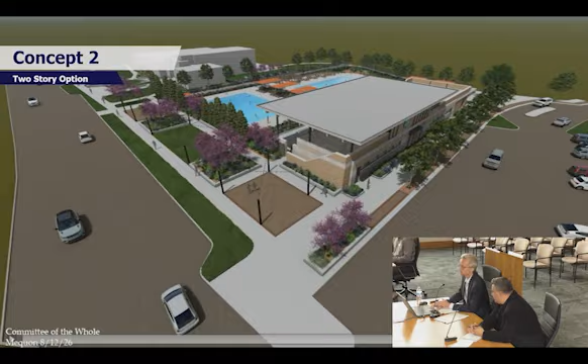Thank you so much. I'm trying to find our presentation, if you give me one second. What am I missing here? They're not seeing the same one. I apologize, I thought we had this. I apologize, Will. Maybe a little assistance here. I can't seem to get the presentation up. Pat, you got it? All right, I'm just trying to pull it up. Yeah, it's not reflecting on there. Make sure we have the right one up. That should be right. Okay, I want to start it from the beginning. That's awesome.

Because we're building a future for the community. What's page one? Page one is this one right here. It's not board—is it going through the wrong one? I wonder what slideshow this is. It's not syncing the two. I don't see what's being presented. Yeah, that's interesting.

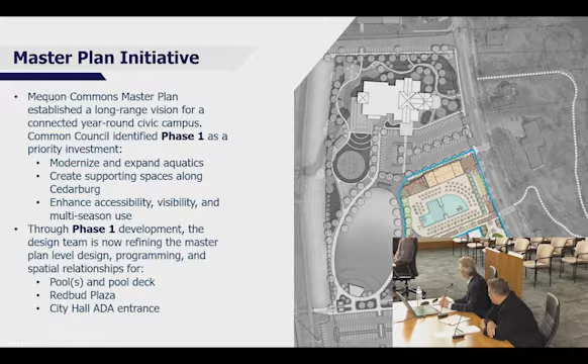Good to see you guys. Just a reminder, I'm not going to spend a ton of time on this because we went through it before and we were here in April under a tornado warning, if you recall. We've had some of that weather recently.

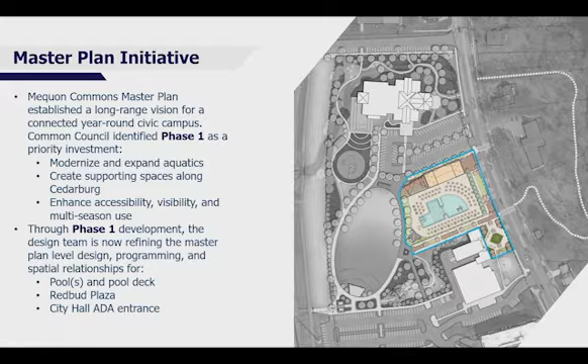But as a reminder of where we were and where we ended up, and where we're starting from in this process: the master plan identified a vision for the entire campus and engaging the rest of the community in a public space. Part of that phase one was focused around modernizing and expanding aquatics, creating supporting spaces along Cedarburg. You do a lot of public events to invite people out, inviting people from Cedarburg into the campus and how the interface works there, enhancing accessibility, visibility, and multi-season use. You challenged us to think about ways we could bring people into campus and use the space in different ways. This initiative is the first phase in increasing that activity and visibility.

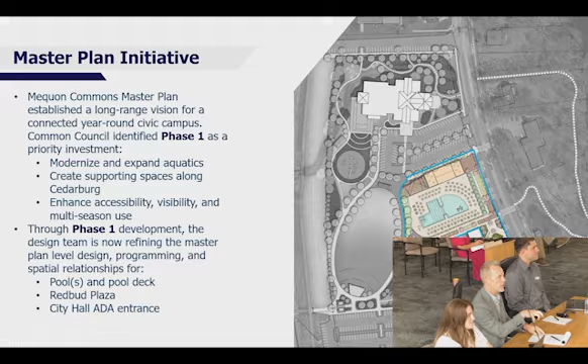Through this development, we're now refining that master plan, moving beyond the high-level master plan into something more detailed, thinking about the programming and spatial relationships that go into building a new pool and aquatic facility, the deck, and all the things that go with it, including the building itself that services that pool. Then thinking about the Redbud Plaza piece, how we're getting people into the site, and also the City Hall ADA entrance and how that might work.

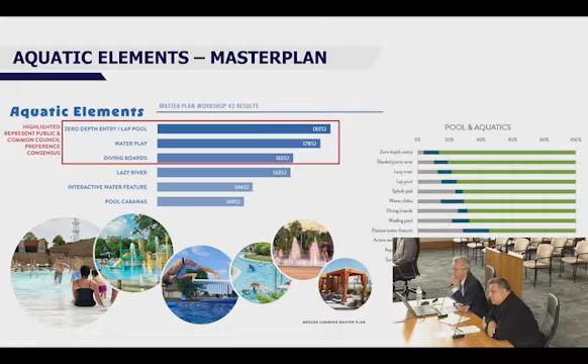As part of that master plan, there was data collected which impacted this portion of phase one, and we wanted to highlight those for the team. This is a snippet from the master plan in which the community, along with some preferences from council, emphasized using a zero depth entry pool, a lap pool, water play features within phase one of the aquatics component, and some diving boards. We wanted to use that as a reference from the master plan, which we embraced as part of our design as we proceed to move forward.

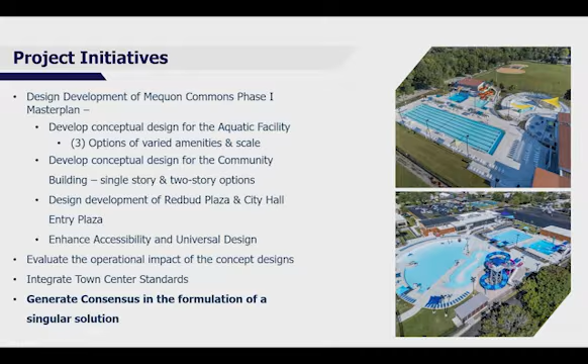Before I start showing some of our design criteria, I want to talk a little bit about the format for this evening. There's a lot of content that we're going to share, a lot of which was shared with you previously to our meeting. What I'd like to do is separate the presentation out so we can break the entire presentation into smaller pieces. So we're going to start with the aquatics component in its entirety.

We're going to show you concepts, costs related to those concepts, and operational and revenue generations with regards to those. Then we'll stop the presentation at that juncture and do a little consensus building, then follow the same format for the building, Redbud Plaza, and the city entry. Our intent is to have the entire group engaged in this process, and our team will answer any questions along the way.

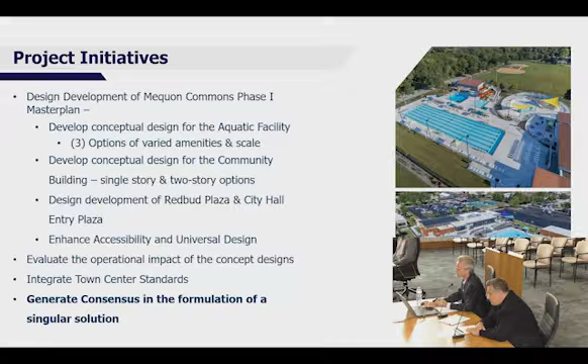As part of that initial discussion, I'm going to show graphic representations of some of the amenities shown in the concepts we'll share shortly, which is reflective of the master plan, but I wanted to get visuals with regards to that.

We have zero depth entry with play features inside of the zero depth end. We do have aquatic structures at varying scale that can be entertained in the zero depth end. Similarly, there can be different scales of vertical play features that can actually be put in partially at the zero depth end of the water.

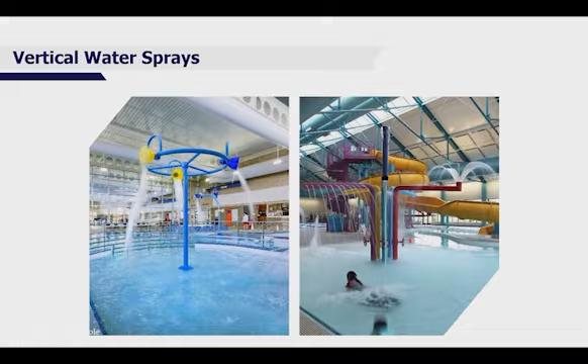When we're talking about a little bit of a wet deck, these are features that can go in a wet deck, like play tables, shade, bubblers with regards to that. Again, similarly along the wet deck scenario.

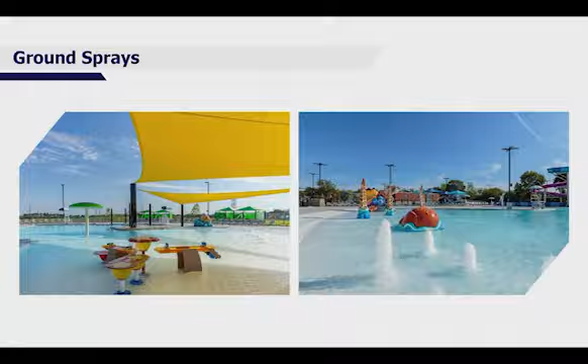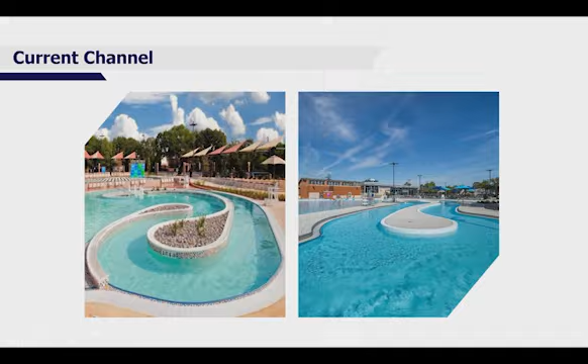We're going to show an option which has a current channel, and I can describe this in more detail. It's something that is resistive in play, more of a lounging component. Sometimes it's referred to as a mini lazy river, but you'll see the scale. The site doesn't dictate that, so we wanted to show a representation of that as well.

Climbing walls, which can actually go into the deeper pool. And we're going to show variations of different water slides. A run-out slide, all the way to the left, is something you don't actually plunge into a body of water. Then you have a plunge slide that actually goes into a body of water, or a drop slide, which goes into the deep portion of the water.

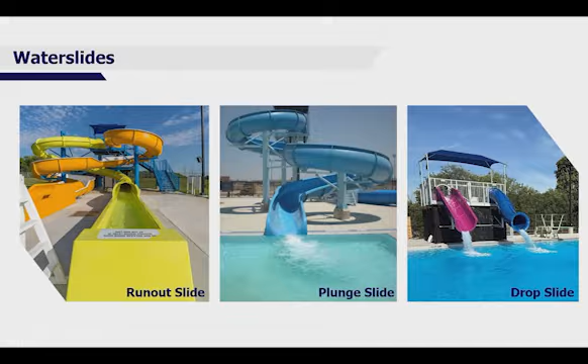As part of our concept designs, as we go through them, we'll talk about activities as well that can happen, similar to what you have now. It can be volleyball play or water basketball play in the activity portions or the leisure portions of the pool.

Within the designs as well, which was a criteria from the master plan, we have incorporated a dry play structure. So that's the difference we have within the fence instead of outside of the fence as part of the aquatics experience.

The 3 different concepts that we're going to show are in varying scale, in amenities, different bodies of water, as well as deck areas that surround them.

So the first option that we're going to show, I usually like to show this more experientially if you're coming through. So we'll table the discussion with regards to the building and the concession area.

Our first concept actually embraces a single body of water, which is something very similar to Mequon right now. So if I were to approach, I'm going to use my pointer here.

If you're coming in through the building on its entry, off to the right, we have a zero depth entry with a play feature to it. It goes from 0 to about 3.5 feet of water in the middle, which is leisure play. All of this water is at 3 feet. We do have benches in here for some lounging capabilities, and the leisure water has staircases that lead you into that.

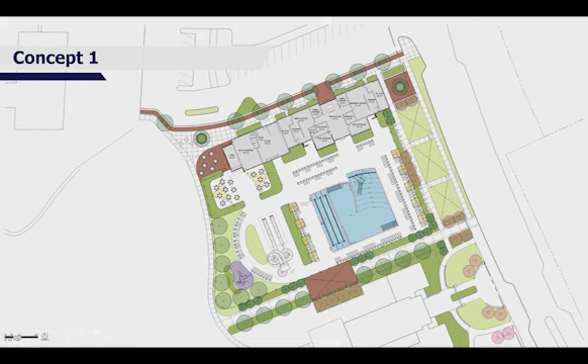As part of this amenity, very simple in nature, I referred to the spray play area or feature that's right at the zero depth entry. So that is concept number 1.

These concepts progress into a different approach, and we have two concepts relating to concept 2. Now we start separating from one body of water into two separate bodies of water. Same entrance - on the east side we have a zero depth entry with a wet deck and play features for smaller toddler children, family oriented. The water is zero depth and proceeds to a deeper 3.5 feet at the other end. There's a play feature as well, but the difference between this one and concept 1 is we are separating these two bodies of water.

In this option, different from concept 1, we're proposing 6 lanes of lap swim as an opportunity. There's a plunge slide associated with this deeper set of water, and this option contains deeper water, which was not in concept 1. The pool goes from about 3.5 feet to 12 feet on the other side of the lap swim, and it has a 1 meter board on the other side in tandem with the slide at the deeper end of the water. That's the differentiation between concept 1 and 2.

So concept 1 does not have deep water, and that could be a point of discussion for today. We've softened the entire landscape with landscaping, and we've intentionally separated these two bodies of water with fencing from two perspectives - point of use with different age groups and demographics, but also operationally. If it's a colder day or there's less attendance, you can close one portion on the west side with the lap swim and keep the other portion open from a life safety perspective, reducing operations associated with concept number 2.

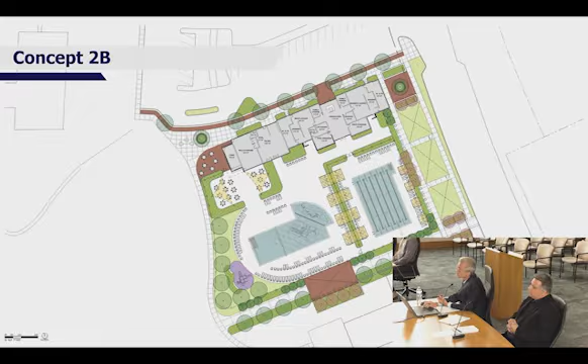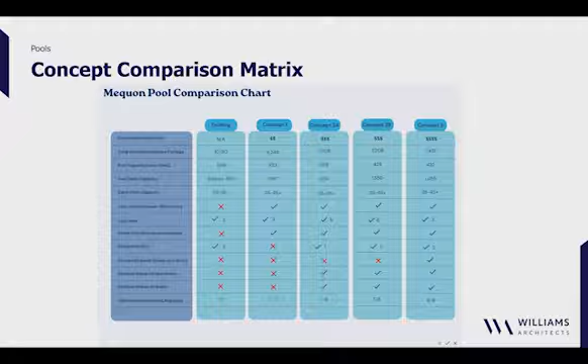As part of our charge, those three options that we talked about all have differing scale and capital cost that goes along with them. So we wanted to share the capital cost for each one of these.

Now mind you, when I show this, the total project cost at the bottom is actually comprehensive. So when we say total project cost, it includes all the hard construction costs with a subcontractor, and any of the soft costs, which are all the engineering and possible permitting costs that go along with that.

In this particular option, concept 1, everything that we're showing has different variations with regards to the cost, which would total $13.8 million. And it is inclusive of the improvements that we'll talk about in the future for the building. So this one actually has the single-story option in it.

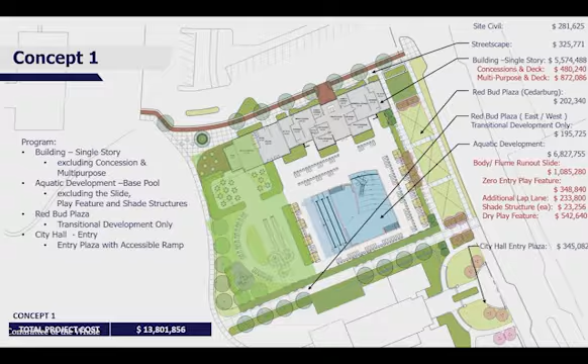As part of the discussion, we wanted to ensure that if there was consideration for an additional lap lane, we had a cost for that, as well as the shade structures and the dry play area. So those areas highlighted in green in this particular concept would also turn into lawn area instead of deck area in that particular $13.8 million option.

Now, as the options increase for option 2B, options 2A and 2B are very similar in cost with regards to the aquatics components. This is showing, in reference, a single-story building with multipurpose and concession, versus concept 1, which did not have those two items.

And on the aquatics development side, we actually have different options for a deep water slide, which was in this particular corner in option 2A, the dry play feature, which is the playground, and then the shade structures, which would include everything shown in yellow with regard to these shade sails.

I do apologize, again this is concept 2 with regards to the Red Bud Plaza, which the Lakota team will share a little further in detail as we get there, but we also have a cost associated with the City Hall entry plaza from a fully accessible perspective. And that total for concept 2 is $17.2 million.

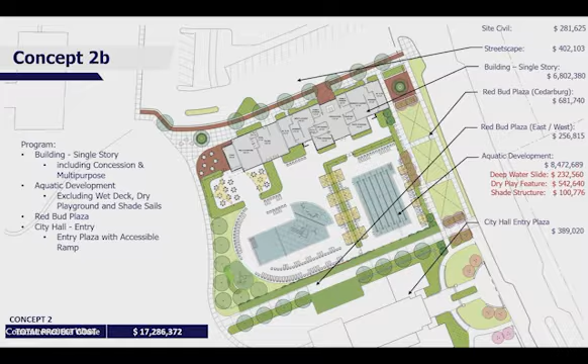In concept 3, similar approach. This incorporates everything we're showing in the design with regards to a 2-story option on the building, inclusive in the $20.5 million option, as well as the aquatic development. The only thing in the aquatic development not inclusive is consideration for an additional lap lane, but it shows the full design intent we've presented to date for any and all of these options, including a 2-story building option.

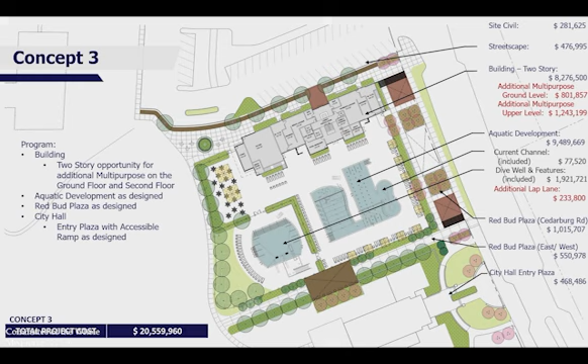Okay, so like I mentioned earlier, I'm going to turn the floor over to Lance, and we're going to go over some expense and revenue generations, which is the operational considerations we have for each one of these options we just presented.

Thanks, Frank. So as part of this exercise, we took a look at 6 variables as it pertains to our expense analysis. What I'd like to highlight is not those 6 bullet points necessarily, from personnel to water and sewer, but also that this expense analysis was grounded in existing user projection data that was provided. Thank you, Kimberly, Kristen, and Will, for providing this data to help project this as accurately as we can. Next slide, please.

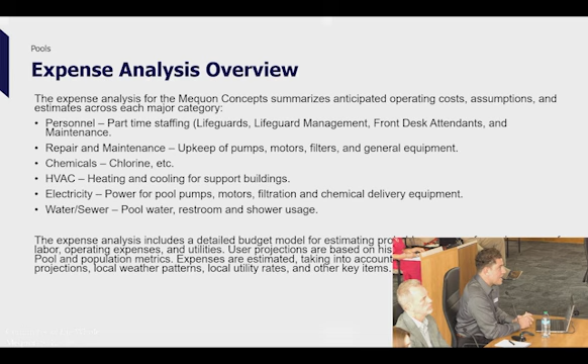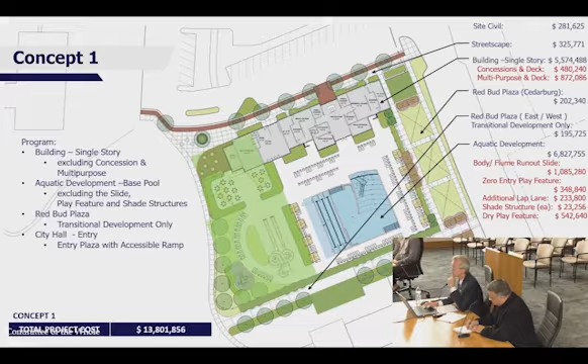I think the best way to start our discussion today is to look at the concepts we've shown, and I can toggle between them. I have a list of questions with regards to generating feedback. I'm going to start with the number of bodies of water we've shown, and the depths of the water, which will lead to another discussion. The first question our team would have is, obviously, if we're leaning toward one of these three concepts, we can start a discussion off of that one. My intent is to use them individually after we hone in on the number of bodies of water, then talk about the amenities that go into each body of water. So the first question for the group is: is there a leaning to one of these three concepts? The difference between those is whether we have a singular body of water, or multiple bodies of water with varying depths.

I see Alderman Strelchek, our pool advocate, raised his hand. Go right ahead, Rob. Pool advocate, I like that title.

I've shared a lot with you in one-on-one meetings, so again, team, thank you so much for everything we've talked about. We did go through the ROI, the lifeguard load, and everything else. I'm just going to bring up one point I didn't bring up before, to throw a little spin at you.

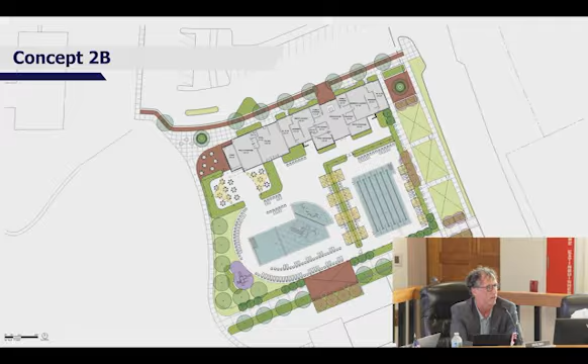How deep in concept 3 are those lanes? How deep is that water where the lap lanes are? Is that in concept 3? Is that shallow all the way along? Correct. So in concept 3, if I can point, the lap lanes are here, and this would go from about 3.5 feet to maybe 5, but usually it's about 3 to 3.5 all the way across.

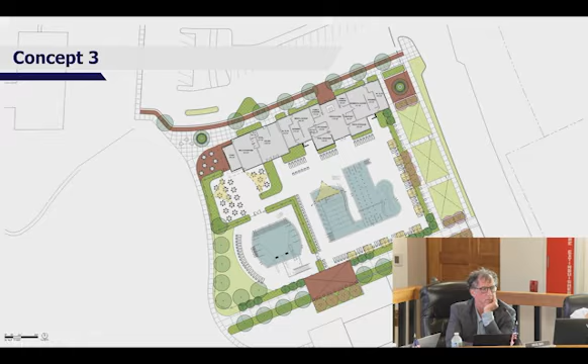So that still could be a play area for kids if you're not using the lap lanes. I believe you guys are hinting to that. Even though we graphically show lane markers, that's only the opportunity if you did want some sort of competition swim, which is a question that I have. But as Alderman Strelchek referred to it, the lane lines actually come out and it's purely used as activity water in each one of these concepts, whether it be this one or option 2.

Alderman Meyer: This may be just a tad off the subject, but it might have to do with whether the pool fits in or not. So the main entry point for the whole plaza there, is the plaza in between the city hall and the pool? The main entry point to the pool is actually on the library side.

A little different than what you have now. So the main entrance to the pool, this is the bathhouse. So you would actually come in through the bathhouse, and then you would have access to that. Red Bud Plaza and the connector in between there are on the south and east side of the pool.

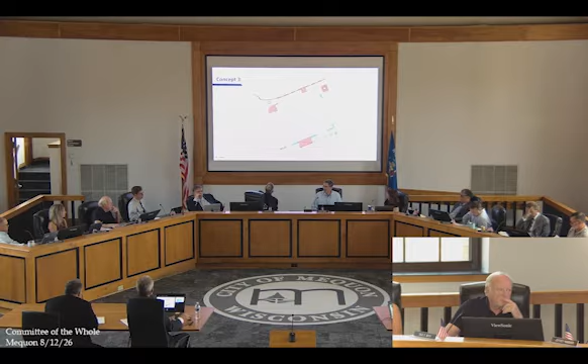So the majority of our parking is actually going to be on this other side of that. The parking would actually be behind City Hall, the one we have back over here, that's going to be one of our main sources of parking. Another would be Division Street over there, and then the library, which a lot of people use until it fills up, then they park elsewhere. But there's bigger capacity over here on this side in the back of City Hall than there is over in the library for parking for the pool.

I'm just bringing that up because if that gets out of the entranceway, because there's more parking over here for it, would that change the configuration of the pool because of that? It would. And that would mean taking the building and putting it on the opposite side and having that as the main entranceway for it. You are correct.

That's my concern, because it's always parking. So when it comes to the pool size inside, that would kind of make a determination inside of it, I would think, for configurations of the pool. Can you repeat that question, please? Well, if that was flipped around, the entranceway being on the southern side of it because that's where more of the parking is, they'd probably be flipping the building around to that side, and then would that change configuration for the pool? It would.

Please take something into consideration from a streetscape perspective. The building being anchored in this location contextually plays off the library architecturally, and it anchors the pool from an orientation perspective. It gives visibility as you're coming down Cedarburg, and gives the best opportunity to maximize the deck and lawn areas associated with it.

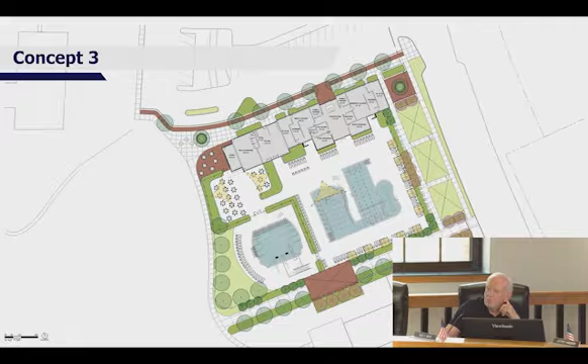I can add to that. We went through this a few times at this level because we had the building oriented in a couple different ways. One option was to orient it along the streetscape, or orient it with parking in the entry, maximizing sun exposure and that kind of experience at the pool level. This worked better from the perspective of how it functions.

Parking has always been a bit constrained on the campus, which is why we're making connections to the larger parking field behind City Hall with a walkway on the west side, knowing people will come from many directions. But we're really trying to create the best orientation for the pool itself.

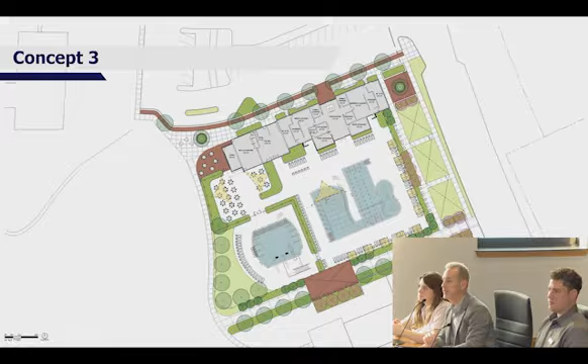I'm trying to envision the building on the south side of the lot, and it just seems way too close to City Hall. It starts to get crowded together, and the massing becomes odd visually.

Alderwoman Talaco: I can understand Alderman Meyer's concerns. However, my vision for this building is that it won't be used just as a pool entrance. It will have community space within it, giving easy accessibility to the library parking lot through the winter and fall months. It's a short period when people will have to walk a little further; the weather will be nicer, and I feel that's attainable.

As far as the conceptual designs of the pool, originally I did not like the concept of two separate pools, but the more it settled in, I think the idea of creating two separate spaces, where younger children have a stricter perimeter without feeling fenced in, makes sense.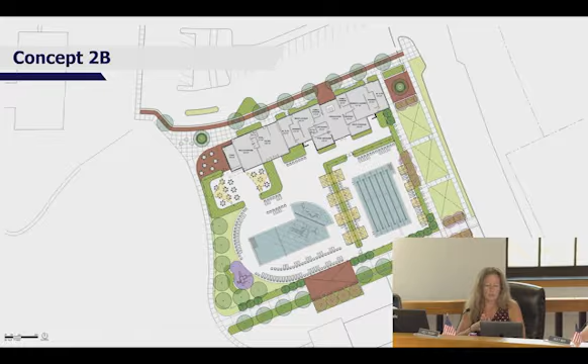Concept 2B has a lot of really good things, mixed with concept 3. The concepts of more of an adult or older kid pool versus a younger kid pool is great.

I guess I'd like to see, if we're going to do a deeper adult pool, that lanes would be available there, and that the kid area would really be the play area with the lazy river, splash pad, zero entry, and a bit more sport activity, so that adults choosing that deeper entry pool would have easier access.

I think it needs a lot of tweaking still, but I appreciate the hard work and how you took our survey into account for what residents want. While the price tag is probably more than anyone would like, doing this right the first time for the next 20 to 30 years will provide for our residents, support neighboring communities and businesses, and attract families. I'm excited to keep this project moving forward, thank you.

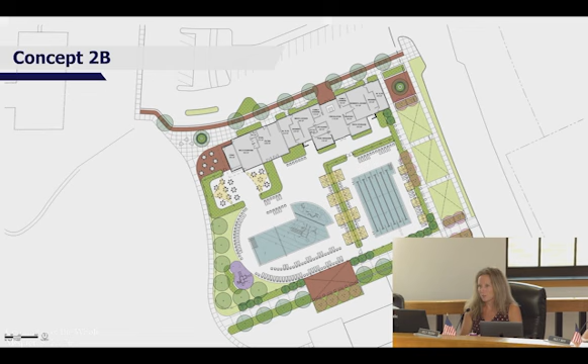Alderman Parrish: Hi, welcome back to the Lakota Group, and to you as well. You did a nice job here. Thank you to Alderman Strelchak for spending time offline to get some of your ideas vetted and incorporated. I think it led to a productive conversation today.

I have a few questions, and I can give you some commentary, but can you explain quickly, philosophically, isn't it more cost effective to have one pool? I get the benefit of a separate pool, but by having one pool, wouldn't there be fewer lifeguards needed perhaps?

Isn't there some savings by having just less material because it's one pool? If you had to throw a number at it? Lance, you want to share, and then I can share a little bit of the operational too. Go ahead, that's a great question.

In the past, I'd say 1930s, right? This Mequon pool was originally constructed in 1933. Upwards of even the early 2000s, we've seen one single body of water, kind of a hole in the ground per se. The advantage of having multiple bodies of water is varying water temperatures and water depths. So achieving a zero depth entryway and 15-foot depth for a 3-meter diving board can be rather difficult to achieve depending on the design. It would certainly require a wider body of water.

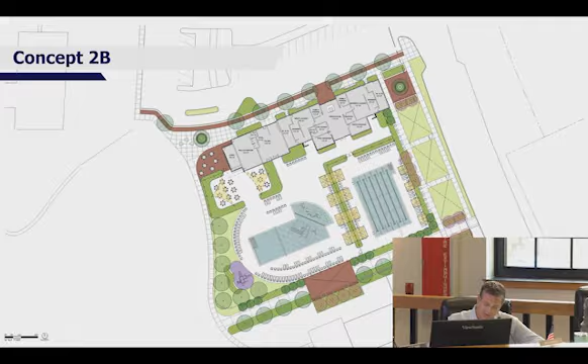Could I ask a question? Sure. I think you might be losing me a little bit, maybe Morgan and Kevin. So are you referring to the areas that are outside of phase 1, making sure there's enough transitional spaces to that? Is that what we're talking about? Correct. I guess it's more of a question for Evan and our staff—they were charged with putting together concepts and estimates for phase 1, and what you're talking about is outside of what they were asked to do, so it's more a comment for our staff, I think.

I think it's also probably for Lakota—this is a little bit higher than I felt your projections were, respectfully, and now I'm struggling and trying to figure out how to get everything we want and pay for it.

Yeah, I think when we're going through this process and getting very detailed on what that spec is, what that building is, 2 bodies of water, the deck—all of the things that go into that project cost—we always have to think about the edges, which you're thinking about, Brian. There has to be something that it connects to, right? You can't just plop a pool down. You have to have a connection to the sidewalk, to the parking lot, to what's happening on the west, and to your point, restoring that to something, whether it's grass or something else, for sure.

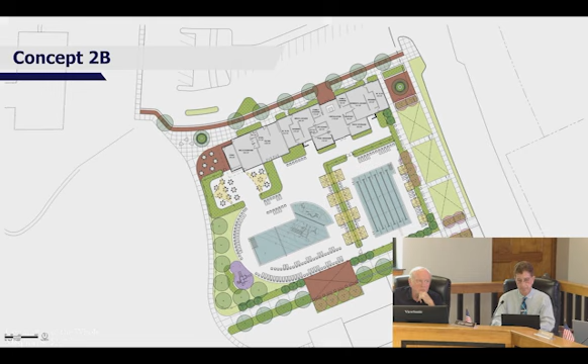As it's shown right now, 2B only has one diving board. I think there's some consensus that we may need more. We have two now that we use, and they get busy. It'd be nice to have a couple. And I don't know if we want a slide or not, something to give it a little more pizzazz than what we have now.

One thing I don't want to lose track of as well is the dry play area off to the side, which is in 2B but wasn't in every concept. I think there was some general consensus of having something small there and available, because some kids just don't want to be in the water, or get sick of it and want to do something else while the other sibling wants to stay in the water. That's an important feature not to lose track of as we focus on the water, just to make sure people can stay as long as they want when those situations happen, because they do happen.

Does everyone agree we're kind of forming some sort of consensus around 2B? Yeah, with those things you talked about, some enhanced amenities in the deep water?

Alderman Strelchak: Is the intent and the consensus around 2B to have the deep end closer to the street and then the dry play and the shallower near the concessions, or what's driving the consensus to 2B versus 2A?

I don't know, I'm just parroting back what I've heard many people say now, and I'm trying to get a little more feedback on that. Feel free to speak freely, we don't have to be so round-robin here. We talked about slides, so I just don't know visually where those slides would go on 2B, and there's not a lot of allocated space.

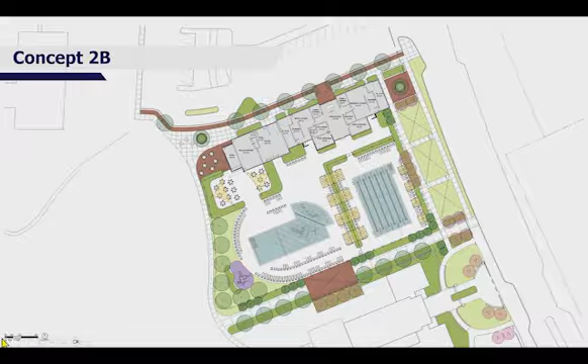So if there is synergy on this side, on the west side, with the zero depth and its amenities associated with the play on the west side of this aquatics component, which actually ties to the concession component as well with regards to that. Now, if you noticed in some of the options, we do have amenities within here as well as the basketball.

To answer Commissioner Strelchak's question, if there was the desire to actually have only two bodies of water in which the lap lane—we'll refer to it as the activity water with the lap lanes—has the deeper side on this side, right, which is our recommendation, by the way. I would not want to flip these so that you actually have it closer to the entrance. We can decide on the amenities there, which I would ask the question about.

So is it okay if we go through each one of the pools on their own, and I'll share things from different slides and bring them here, which will give us some pretty good direction on what the amenities would actually be in the deep water, which I think I heard the mayor just say.

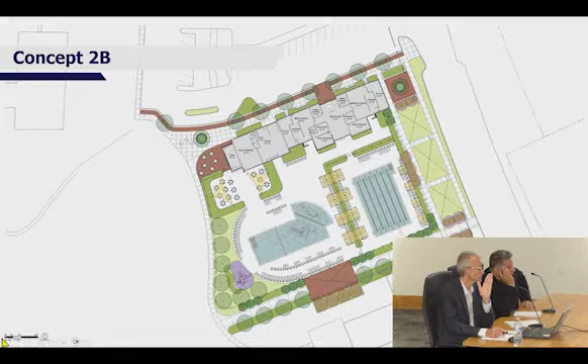Keep in mind, your 2B version on the summary page on packet page 28 is different than the main page. The pool is flipped, so that might be a discussion point you want to ask about.

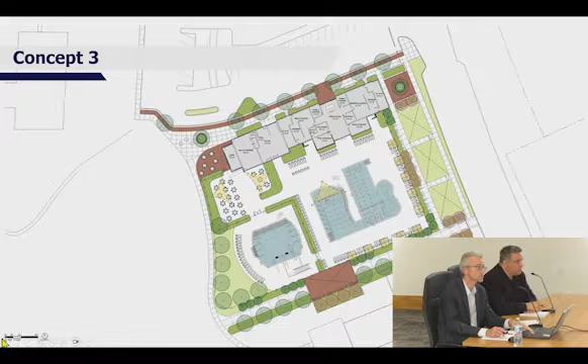I'd add too, if you're going to want to leave at least one lap lane open all the time, so if adults are using two lap lanes and want to swim with their kids, keep in mind that's going to take some of that geography away from the pool because you'll have lines in there, at least one or two lanes. So that's cutting it up a little bit.

Okay, so I'm going to refer between 2A and 2B, correct? Commissioner Strelchak, you have 2B, which is your main packet page, and it shows the pool with the notch in one corner. Then on the summary page, titled aquatic design summary, packet page 28, the 2B pool is switched with the notch closest to the dry play system.

Yeah, the zero depth entry is off to the west versus where we're showing it off to the east. Is that what you're saying? Yeah. I noticed that too, I think it's great. Yeah, I love it, I think that's preferred. Our animation shows it on the west side. Okay, sorry, I didn't have my microphone on, I was trying to understand what he was saying.

So basically, you're saying that mirroring this pool the other way is the preferred option. It keeps the small kids by the dry play area so they can go between the two, and a mom can sit in the middle. It kind of hugs the landform edge as well.

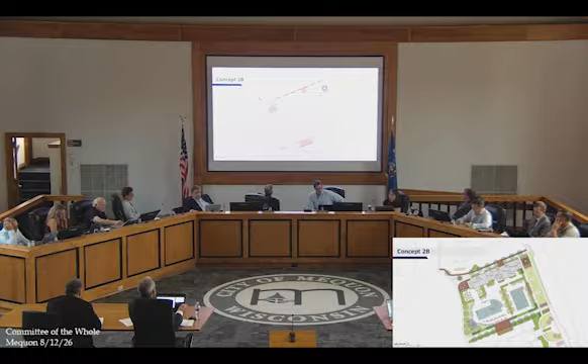The only challenge with 2B is where would you put a slide, because you're showing a large mass of seating on the east side of the street in 2B. When those kids come out of those seats and jump in, they're going to jump into the lap lanes. So you kind of want to divide that out from wherever we choose to put the slide.

So let me ask the question about that particular option. If I can go back to the different options or amenities with regards to the water, we're talking about a couple different things here. Here's a deep water configuration, so maybe that's something we can actually talk about. This is showing the lap lanes with regards to that.

So the discussion would be, when we talk about a slide, there are different variations of a slide, so why don't we really talk about these individually? Is there a desire to have a 1 meter board? Two, okay, I heard 1 meter board. Is there a desire to actually have a 3 meter board, which is the taller board in the middle? Well, I'm asking the question, right? Yes.

It's nice, it's just it causes insurance or some kinds of issues. Yeah, and I don't know where that is. The one thing to keep in mind while evaluating boards and slides is you're going to need a guard on top of the slide to release people, but they could also manage the board on the same side with the same concept. So you could have dual benefits from a safety standpoint of that guard monitoring traffic on both ends.

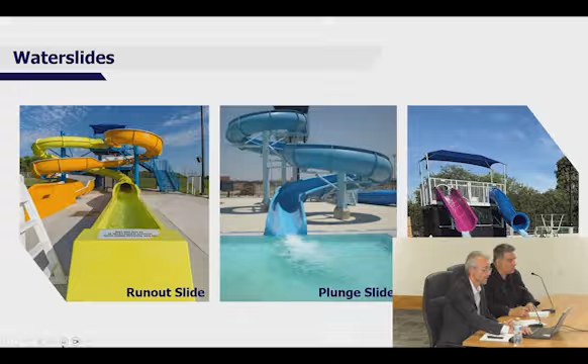The wish list is vast. Asking the question, I see a lot of head shaking, but for the time I bought pool passes at the old JCC pool, the climbing wall was pretty popular. Yeah, sure, great. It will get used if you put it in there, but you don't have to put it in there.

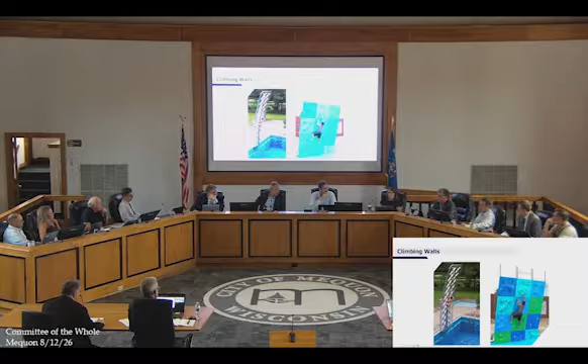But I have one question - when you're putting those boards in and the slide in the deep area, don't you have to cross off that area? I mean, you have to put something across the pool, a lane line. You are across that, correct? Because you've got to separate that from the kids playing in the other part of the pool. So somehow that's going to have to be divided.

So if we looked at this option in the course of the day, aside from the lap swim, you are correct - if you had these amenities going on the deeper side of the pool, you would divide it with a lane marker at about 5 feet, if I'm not mistaken, Lance. At the 5 foot marker, because the depth gets deeper, there would be a lane marker indicating shallower water here and deeper water there. So you are correct, on the deeper side there will only be 3 users at one time using that depth of water. So that cuts off your geography - if you have 2 lap lanes, then the line going across, you've got one little area for play at the top. That's what I'm saying.

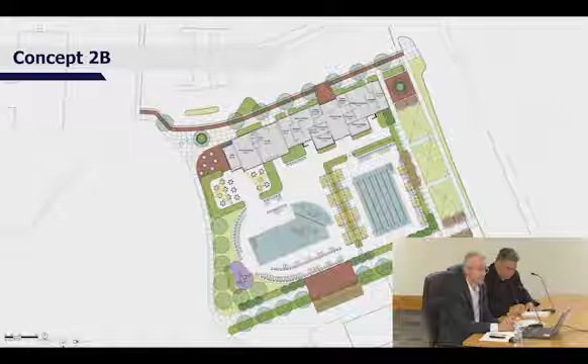So can I ask another question, which maybe that's triggered? I'm just throwing ideas out there - in concept 3, we do have a separate deep pool, which would alleviate that concern that was just presented. Yeah, I was just going to make that point. I think that's why you presented option 3. That is correct.

I think operationally it makes a lot of sense. I don't know what others think though, because all the activity in the deep well is deep well activity, so you don't have the slicing and dicing of areas and needing to reconfigure.

If you isolate just the pool cost too, there's not an incredible difference in cost between any of the options, at least based off the materials in the packet - if you look at just the pool, just the components, and forget everything else. I think that was lost a little bit on some of the summary slides because we're mixing building and pool and different versions of Red Bud Plaza. It gets hard to isolate.

But based on the info in the packet, and maybe numbers have moved around since it was generated, from one pool to the next - I had it, I don't know why I can't find it. I actually have it in the presentation if you want me to show it. Sure, further down. There wasn't an incredible cost spread from the very low end to the high end if you're talking about just the pool.

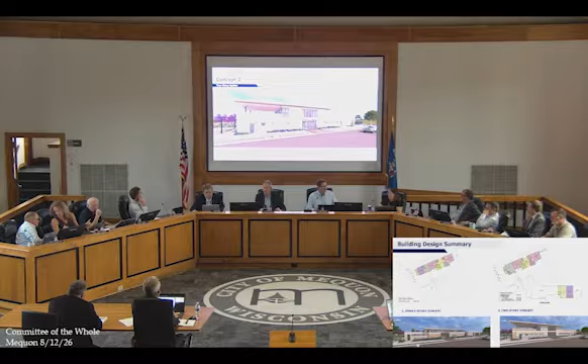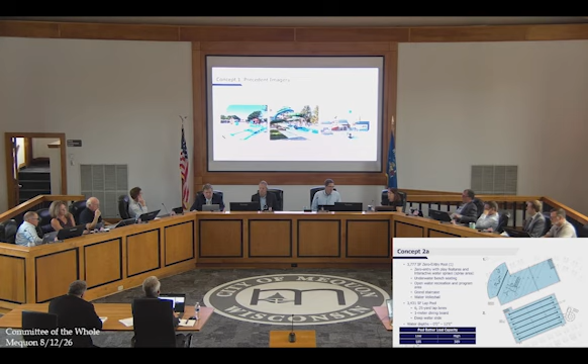I think just looking at that makes the discussion a little easier when we're talking about just the pool, just the pool amenities alone. So I'm trying to find the summary slide with the costs. Can I propose something? Yes.

So in concept 2B, the pool with the shallow water getting a little bit - the zero entry is great. I would propose that somehow you add - I'm still in favor of seeing this lazy river. I think it's going to be an awesome feature and is multi-purpose. In pool 3, that deep pool is awesome, but I think the scale of it is wrong. I think that's where the lap lanes need to go, so if it can be a little bit longer, or you guys can change that configuration, I think that gets us to all of these concerns, squared up.

Let me keep going. My understanding is nobody wants more, well besides maybe Rob wants the 6 lap lanes, but I think we're all agreeable that at least 4.

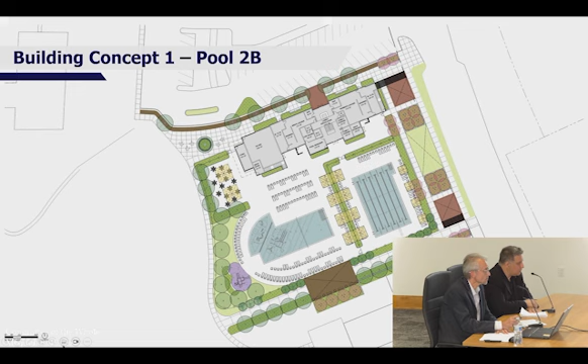There's some discussion around 4 lap lanes from when Rob and I got a preview of this, two or three weeks ago. The concept of having lap lanes in a multi-use pool is that it opens it up to a swim team coming in for morning workouts, or the rec department choosing to put in lap swim, and you only need a single guard to cover that. You don't open any of the other features, you just have it in the one pool. I've guarded those type of situations in the past.

Can I go back one? Sorry, sure. You want to go from one pool to the next. So I just heard, potentially to solve the operational issue we talked about, instead of putting a lane marker in the 6-lane lap pool, there's consensus to go to a different deep hopper pool, which has the amenities we've shown: a 1 meter, a 3 meter, a drop slide, and a climbing wall in a different body of water. So if I go to this particular option, the next question, am I understanding that correctly thus far?

I think it's worth considering. We aren't pool experts, we don't know the logistical operational constraints, and I think we're learning as we talk here.

The next question I have, which leans to what we were talking about with concept 2B versus concept 3, is there a need to actually have 6 lanes of lap swim versus 4 lanes of lap swim? That'll guide the design in that particular regard. So, 4 lanes of lap swim, do I have a consensus on that?

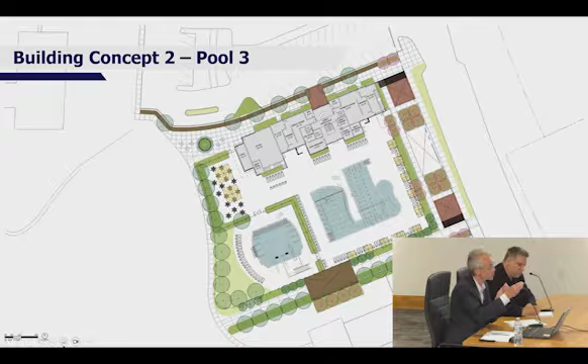So the first question we would have is, is there a desire to actually have a play feature, which could be scaled to the size appropriate in the zero depth entrance, and that in tandem would go with the question of additional play features, which would have the wet deck we're showing here. So I guess I'll start with the play feature first.

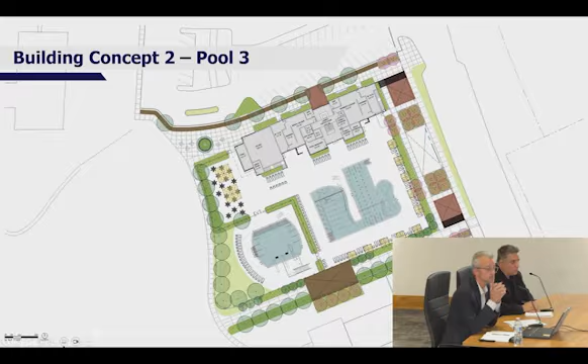I think it's a missed opportunity to not include something like that. I agree — for the younger patrons, I think it would be extremely popular. Every parent's going to want that for young kids.

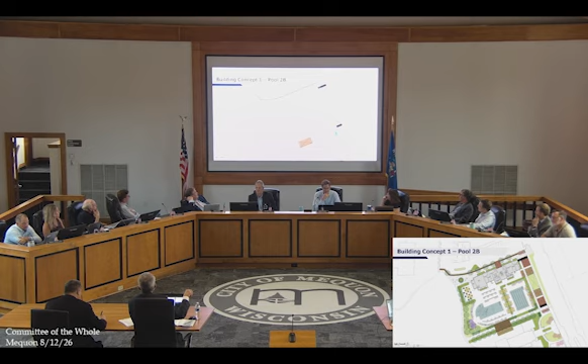Okay, got it. And then how about the extent of — we'll determine what scale that is — and then how about the extent of the difference between what we'll call a wet deck and the play feature? Obviously these are different age groups that would scale up and down. Now, there could be a happy medium between these two, where it's not as big as this but not as small as the other one, as far as a wet deck and feature goes. Maybe you can show them the slides.

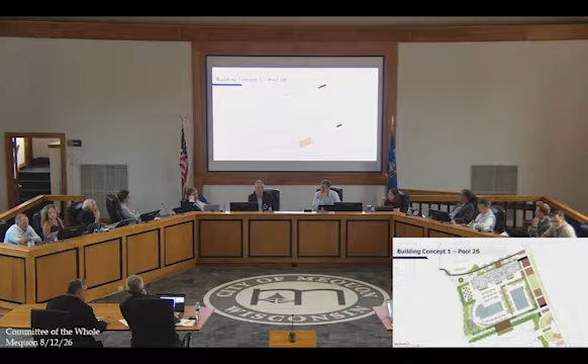Personal opinion, I think you nailed 2B in the summary page right on the head. The only difference is to reconfigure that deep end and figure out what that means to get some lap swimming in with that and a climbing wall. You just need to reconfigure the deep end. But well, I think that's the challenge.

In my opinion, and other people like the lazy river, so I think the challenge is balancing the need. If you populate that deep end — correct me if I'm wrong, I'm just trying to piece together the logic you used — with the 6 lanes, if you fill that up with features on the deep end, as soon as you shut down a couple lanes for lap swim, you're giving up a slide or a climbing wall, and now we're creating conflict.

Whereas if you just took concept 3 and put all that type of activity in the deep end, then you can have 4 lanes, and maybe you shut down 2 for lap swim and 2 are playing basketball or other activity — it's not quite as impactful to operations. Yeah, agreed, but keep in mind on the slide page you had the drop slide, the run-out slide, and then the slide that's its separate and own unit.

I've witnessed kids preferring the run-out slide, that middle slide, over the drop slide. The drop slide's cool, if we can throw it in and it fits, great. But I think kids like to feel the run-out, not the plunge.

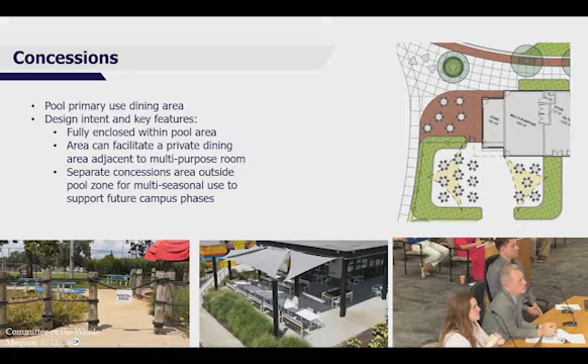So we have two different options for the concessions area that relate to the two different building concepts, the single story and the 2-story. I'll go through the differences here. This is the single story building option where we are showing the concessions and the multipurpose room side by side at the end of that building.

What we've done is split the area for concessions dining between what would be inside the aquatic area, inside that square and line fence symbol on the edge of the green space, and then have another seating area in the red paver area outside of the aquatic space to allow for more dynamic use of that space in the off-season, outside of those 3 months that the pool is open.

Within the area inside the aquatic zone, it is split between a general use area and, on the right side, a smaller zone specific to the multipurpose room. So you'd have the option to cordon off that zone and operate it specific to events going on inside the multipurpose room.

With the second option, the architecture team is going to show some different uses for the multipurpose space in the building concept. What we've shown here is a consolidated concessions area all within the aquatic footprint associated to the concessions building, still situated on that west end of the full building structure.

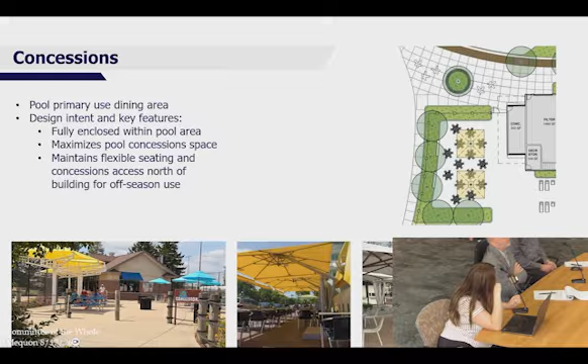Can I make a suggestion with regards to this? Initially, I was going to ask if we can have direction on each one of these options. But I think the discussion with regards to the buildings may actually lean toward which option it goes with in this particular case. So with that, I'm going to turn over to Rocco. We're going to go over the building design initially, and we'll talk about the single-story option, then the 2-story option.

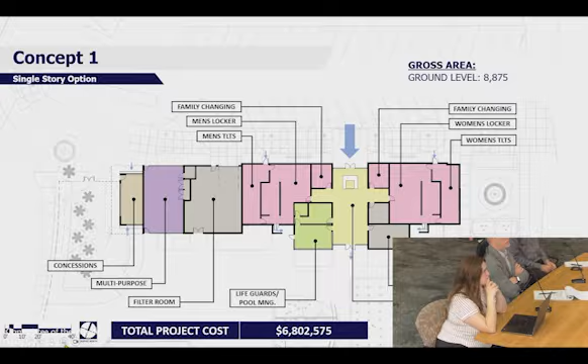Thank you, Rick. So the two options we have are single story and a multi-story, or 2-story, option. The concepts are similar with respect to program size and adjacency. The main difference is where the community room is located. So I'll briefly give you a depiction of what the colors are.

The program area in pink is the toilet facility and locker facility, flanked on either side by the yellow space, which is the main entrance to the pool area, with the blue arrow indicating where the main entrance is. There's an opportunity to make a connection from street to pool through that lobby space, so there's some transparency to the building.

The green would be the aquatic function with a lifeguard and other amenities for the aquatic program, and then some support spaces for both aquatic and building functions on the opposite side of the corridor from the main entrance.

Going over to the far west side, concessions was briefly talked about. That can basically be approached from three sides, and there's some flexibility there.

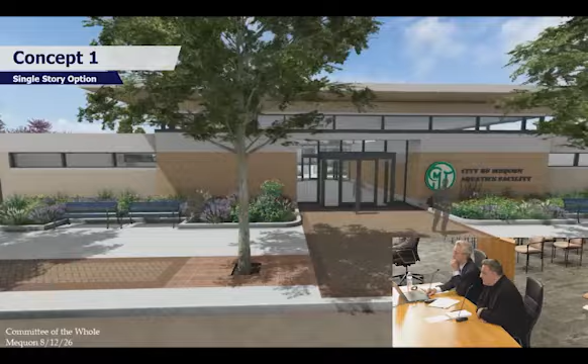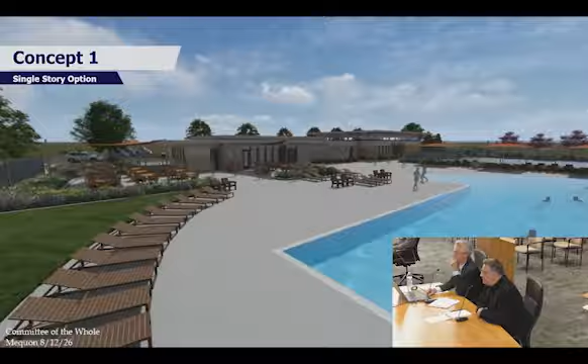And this is an animation of that single-story scheme. As we go through it, I'll describe what you're seeing. We've used the design principles and design guidelines to help create the architecture that uses materiality and different material textures to break apart some of the volume. It's a long linear building, and this helps create visual interest as we go from one side to the next.

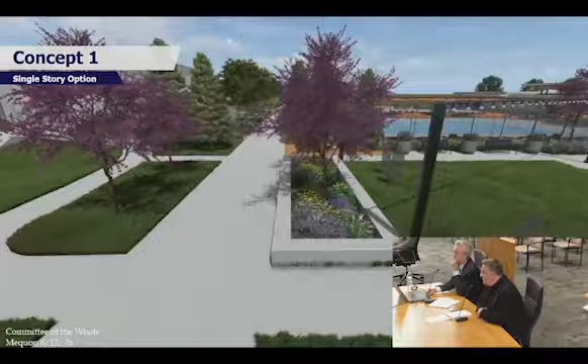The big overhangs can let light into the spaces, but also create some shade. And then as we're seeing the other features, we're going to be talking about the plaza and the Redbud Plaza that we're seeing here in further detail down the road. But you can see the character of the pool in relationship to the building.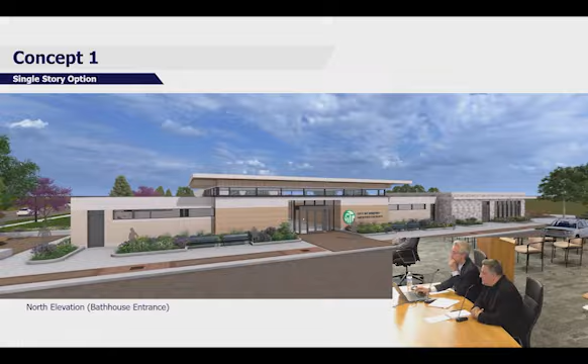And this is a still image of that building. So the second story scheme, or the two-story scheme, has a very similar layout, similar kind of construction of program adjacencies. We would add a stair and elevator up to the second floor, but the only difference in this plan is...

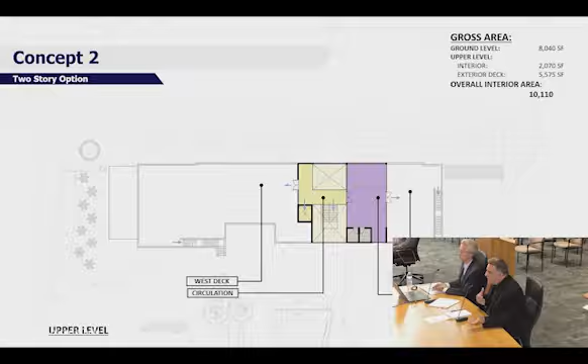that purple space that was to the west side is now moved up to the second floor. So we're creating a division of program use, meaning the community room now has its own special floor, its own special space. But we also have opportunities now, if we create a second floor, to inhabit that second floor, and especially with a pool program, we can use that as a connection to the outdoor environment. So the purple community room can have a terrace dedicated to that use.

It kind of doubles the square footage to that area, and then off to the left, left of the yellow, we'll have the opportunity for an even bigger deck, which could be used in conjunction with the pool program. It could be a sun deck, an adult deck. So there's lots of opportunities in the two-story scheme to increase the amount of programmable area.

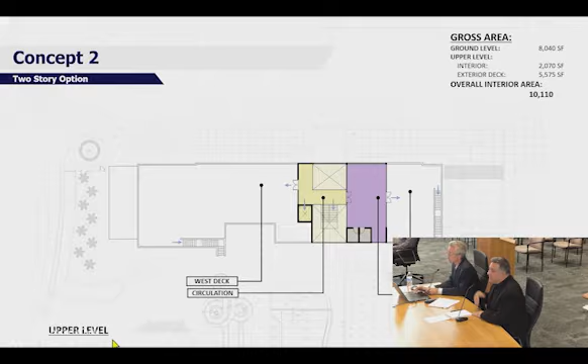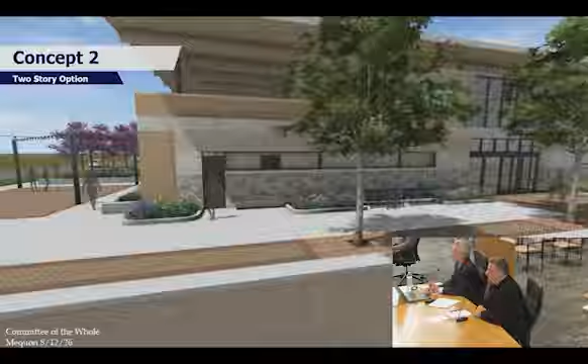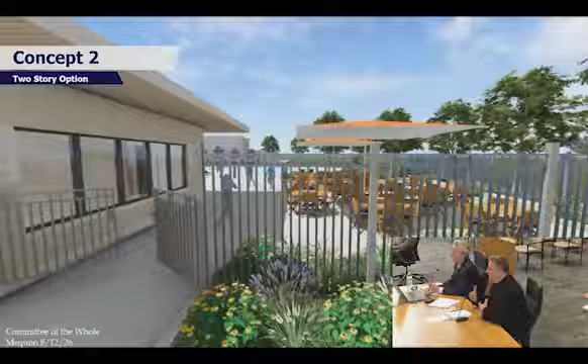In some of the pricing, there was some consideration for adding a second program room to the second floor. There's opportunities to do that. There's costs associated with it, but there is opportunity to have a bigger impact to the site. I think the benefit to this is it has a more vertical presence off Cedarburg Road, and it also allows more dynamic engagement, both for festivals or the pool function alike.

You can kind of see some of that, and that's the pool configuration we were talking about before, the zero depth opening up to the west, some of those cantilevered shade structures, and then we have both covered and uncovered roof areas or terraces.

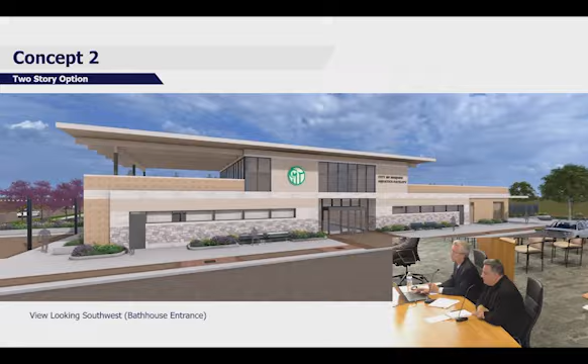Then Lakota will talk about the different options here. You see the different Redbud Plaza options depicted in these renderings individually. Okay, this is a still of that model, or the animation that we had. So this is just giving you an idea of what it would look like from the parking lot.

Okay, so a couple things we want to have just for discussion, which ties the concession component that the Lakota team shared along with our conceptuals, of course, is consideration for concession and the multi-use. So we have questions with regards to: is there a preference for a single-story option, or a two-story option? Is there a preference to actually have multi-purpose rooms? Because presently, the existing facility does not have multi-purpose rooms associated with that in that particular instance.

And similarly, we're showing concession in there, which is obviously calculated as Lance has shown in the operational model. Is there consideration to actually have a concession component, or not? Because right now, operationally, you do not have a concession component as part of your facilities. And I think if the decision is made between these two, it'll start guiding the design of the site impact that we showed previously.

Some just quick comments, I'll go quickly. Just a subtle thing - I would change where it says lockers to changing rooms. You had family changing rooms, and then men's and women's locker rooms. I would just change them to changing rooms. The goal is just to change and get out of there.

And tangentially to that, in my experience, the number one issue we had at schools were the unsupervised areas in changing rooms for PE and athletics. So that area is kind of an unsupervised area, and I was wondering if there would be some connection from the lifeguard room so that if you heard some noise and needed to take a look, or kids are playing around - the goal is to get in there and get out, but that doesn't happen with middle school kids. It's a place where things can happen. So how do you get access in there, and can a guard, if they hear something, get into that room and say, hey, get out of there?

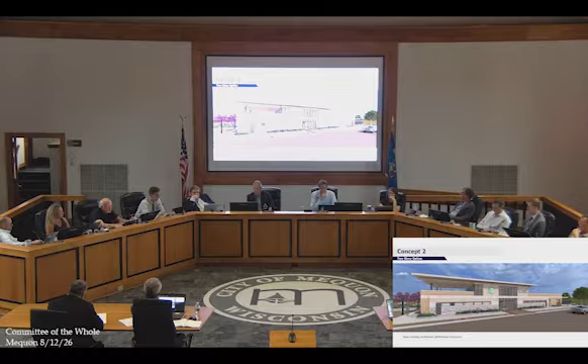My only question on that is, and I know it's just a concept plan, taking a look at the first floor, there's just that small little sliver off on the side for concessions in there. Is that something that can be turned around more, so the concessions would be facing the pool more, so you got the windows there facing forward?

I believe, go ahead Rocco, go ahead. Turn the mic on. Yes.

We had considered different configurations for the concessions, and a lot of the discussion was, can this be used for not just the pool. So the configuration kind of dictated that we wanted to put it on the end. If we exposed the concessions more towards the pool, we would have prevented the opportunity for this multi-purpose room to be used for both outside and pool use.

So it was predicated on those two principles. Whether we want more exposure to the concessions and exclusive to the pool, I think that's part of the discussion. But I think the preference would be to have concessions, if you had it, to be able to use it as a solution for multiple seasons. If you think we can't utilize it and switch it around the other way, then I don't see any need to have it, because it doesn't really have any exposure for people to see that. But I still like concept one and the single story.

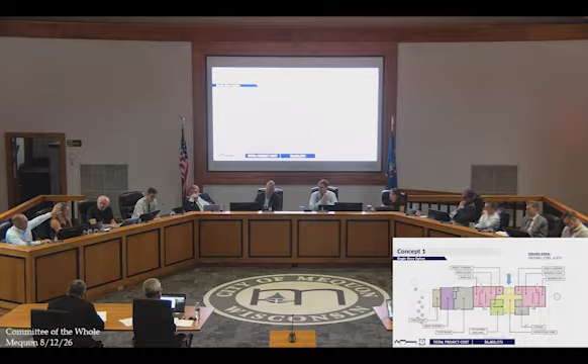If we do the ice skating in phase 2, where are they going to warm up? Where are people going to go warm up? Are we going to build another building for another $1 million or $2 million in that space? What does that include? This building is here and it's functional, and it could be multifunctional and serve the purpose for the winter festivities, ice skating and things like that.

But really where I struggle is I don't know where our rentals go over winter. Maybe we should do an analysis on that. I don't know what the parks are doing for the room rentals. I don't know if the Rotary gets rented in winter. But this space definitely could be, and it would be a really great space to have for the community to come and do community things. So that's just my piece. Thank you.

Any other feedback from anyone that you'd like to get out? Otherwise, I'm going to maybe ask for a show of hands with a straw poll. Maybe just some comments. If you're looking minimalist just to cover the pool, I think it's important to have at least one room on the first floor for rent, because birthday parties would be very popular to rent out, and it's a revenue source.

And that goes hand in hand with concessions. If you're looking for more of a multi-purpose year-round community center-ish type solution, you might be in favor of 2 stories. And I think that tracks with some of the comments we've heard from people. So by show of hands, who's more in favor of concept 1, the single story? And then the complement question, show of hands for those who favor a 2-story solution in some form, with the ability to - there's some question of 1 room or 2, but I think they can get flushed out when they come back.

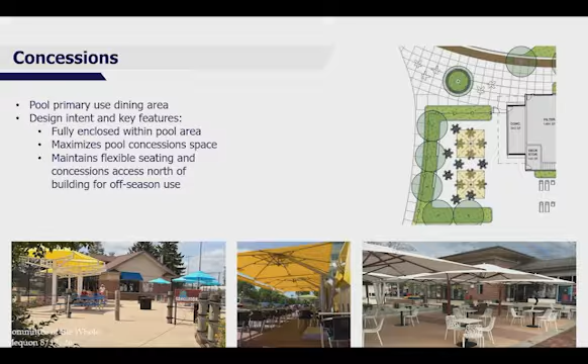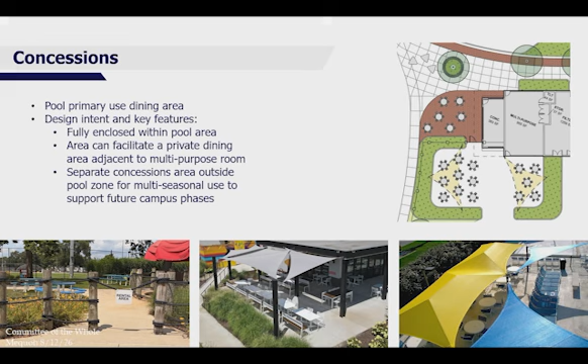Thank you, you have a point, Alderman Parrish? Yeah, I know we want to move on, but I just feel like if we're going to have a playground essentially in this pool area that's going to be double-sided, why do we then have another playground by the library?

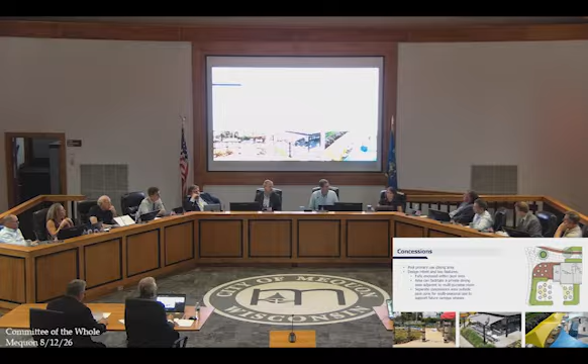I think that goes back to the concept plan we approved. It had a nicer playground located close to where the playground is now. And it's odd having two playgrounds, but I get it.

Through way of comment on the pool space, we ended up with a small play area in here. That can be shown as an option that can be à la carte, taken in or out when we come back with the pool plan, I think. Then we can decide if the juice is worth the squeeze on that one.

Alderman Bratt? For the concession, I wonder if there's a way you can set it up so that even the stuff that's kind of in the pool area can be used for seating. Like there's another gate further down, just to use that space for other events. Just a thought, we can explore that option. We can share that, there's definitely an opportunity, if that's desired, that can happen there.

Okay, so I think we've given them hopefully enough to work on with the building and the concession configuration. We just have a couple of other aspects, hopefully we can get through quickly.

City Hall entrance, Redbud Plaza. What are people's feelings on this? This is where I struggle a little bit. Some of the concepts are on the more expensive end. I think we want it to look nice, but I don't know if we necessarily want to spend the money here.

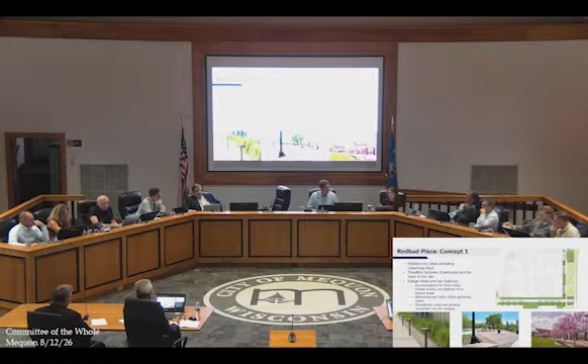If that's enough direction to go with, unless anyone wants to talk about the options more, maybe that's enough to go with, come back with the revised plan. Does everyone agree? Nod, raise hand, thumbs up. Okay, I think that got us through the packet. Is there anything we missed? I think we got it all.